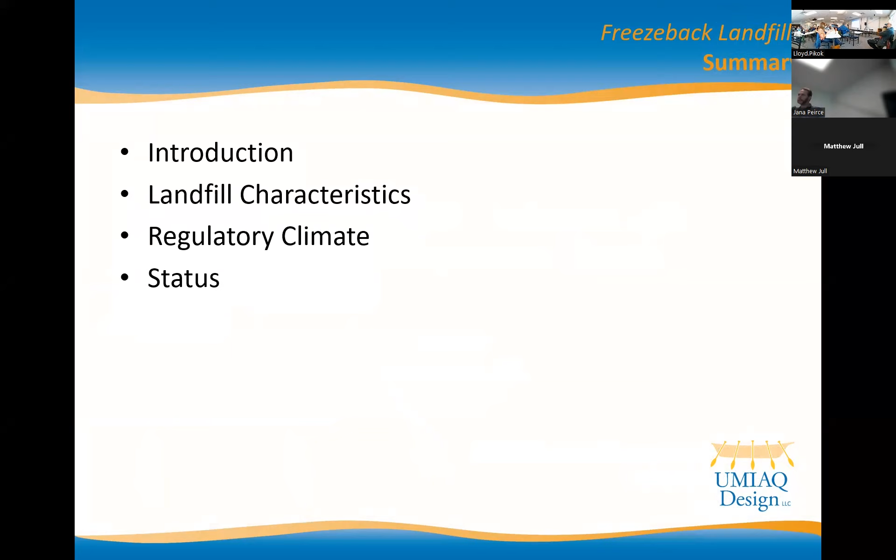This is really just going to be a recap, because we haven't really talked about landfills in this group to my knowledge. It's been kind of an out-of-sight, out-of-mind topic—it's outside of town, and generally people just assume they work. So we'll go over the basics of a landfill, more particulars on what freezeback landfills are, the regulators, current perspective on them, and where that leaves freezeback landfills.

We already did this.

One other thing is that I've spent a lot of time up here doing water and sewer work. I've spent three winters in Point Lay with the group here, as well as three winters in Wainwright, so I've seen a lot of the conditions there change over time—a lot less time than Bill or some of the others, but it's changed dramatically even in my time.

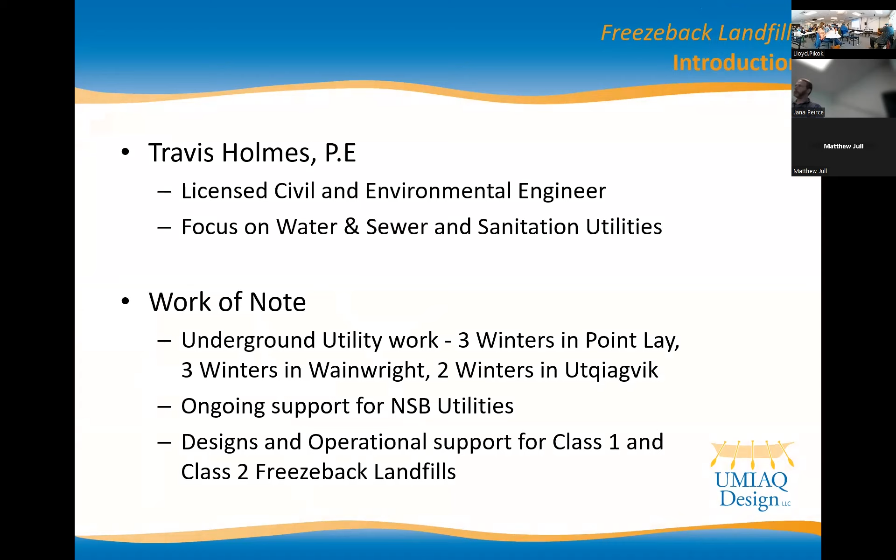Landfills are basically an engineered structure that's regulated by EPA, and in this case ADEC. There are federal CFRs that govern them. The whole goal is to provide environmental protections for solid waste disposal. We need to have that solid waste disposed of terminally—we can't have it leave the site, and we can't allow contamination to a groundwater source, surface waters, or lands. So there are containment structures built in that we'll cover here in a minute.

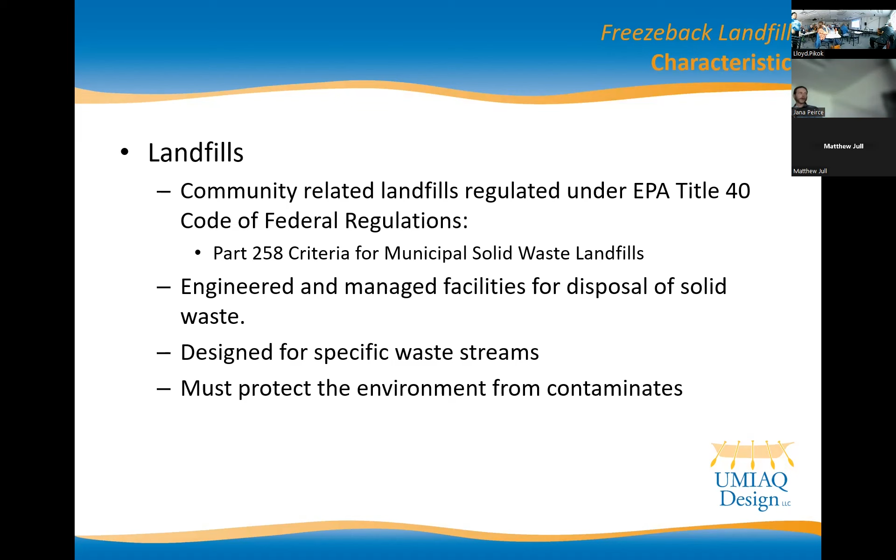I'm not going to be quite as dynamic with this one. If you have questions, go ahead and flag me on the way, and that'll help keep this a little more even-keeled. Landfills have different classifications.

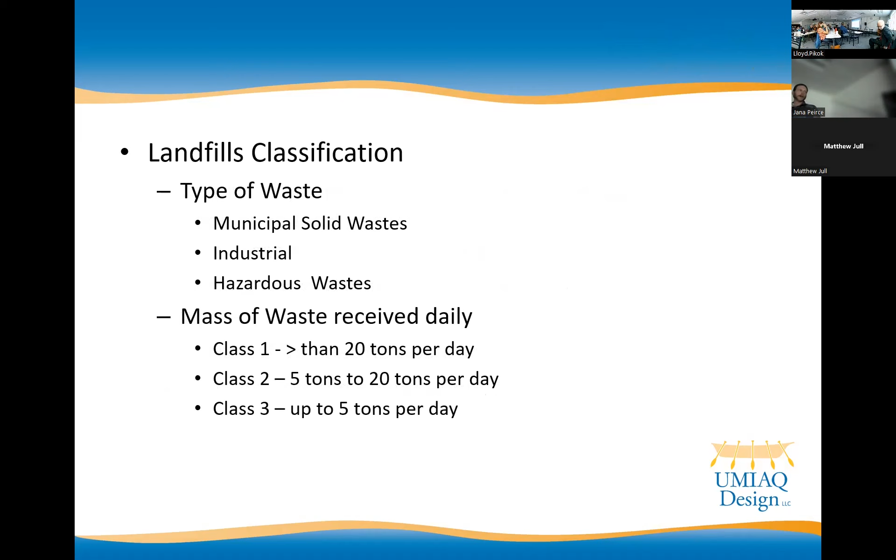Types of waste are a main component. There are some subsets that aren't listed there, and then they're classified by how much waste they receive per day, which affects the regulatory criteria for the landfill, the reporting, and a number of other operational components.

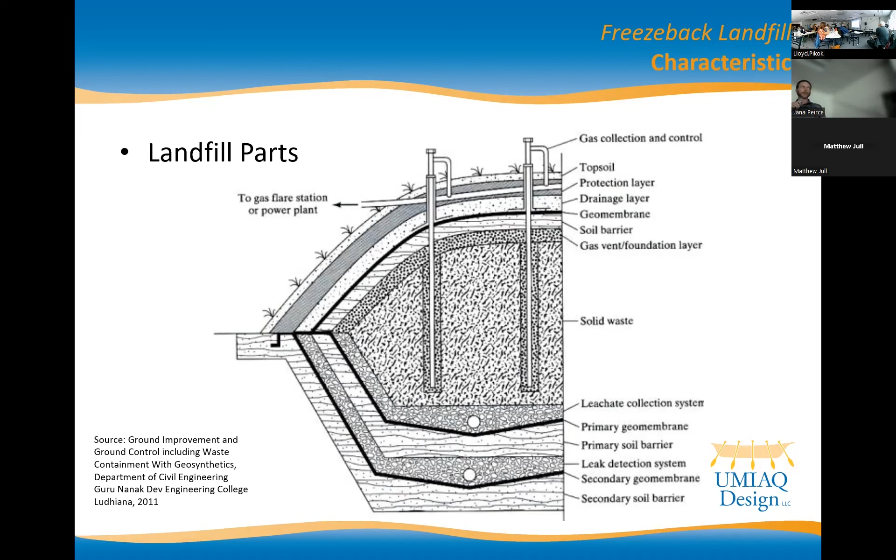So the meat of what we're looking at here today is freezeback landfills. I don't have the history on when this was put into the Alaska regulations—it's not a federally regulated description, but there are certain criteria that trigger it. We have to be on permafrost soils, which the Alaska Administrative Code defines. It has to operate where we don't degrade the permafrost, and we have to ensure that the permafrost remains frozen throughout the open and closed life of the landfill.

Part and parcel with that, though, is as the name implies, we have to be able to freeze our waste. So that's where our challenge is. We'll get into that here in just a moment.

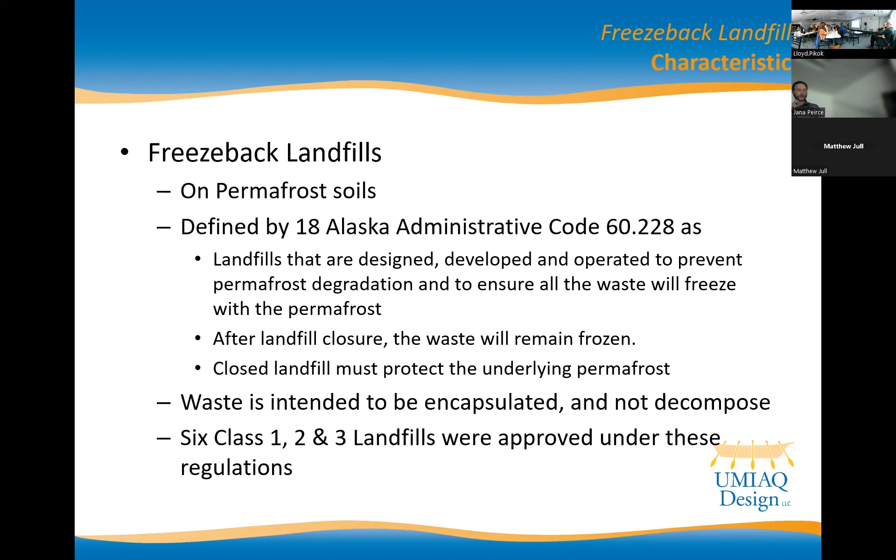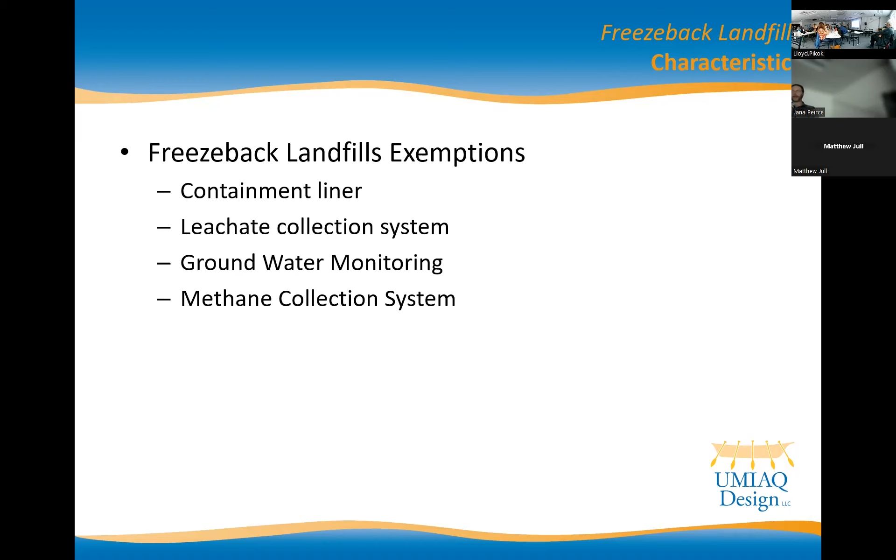Freezeback landfills do offer benefits to the operators, and it winds up being operational and capitally driven components. We don't have to construct containment liners. We don't have to construct leachate collection systems. There's no groundwater monitoring, and there's no methane collection systems because the waste are not decomposing.

A requirement, again, is to keep the permafrost frozen underneath the landfill. So that implies that we either have to have insulated pads or thick gravel pads to do that. We have to provide enough insulation over the permafrost to prevent it from decaying on us. And in order to do so, we have historically used gravel.

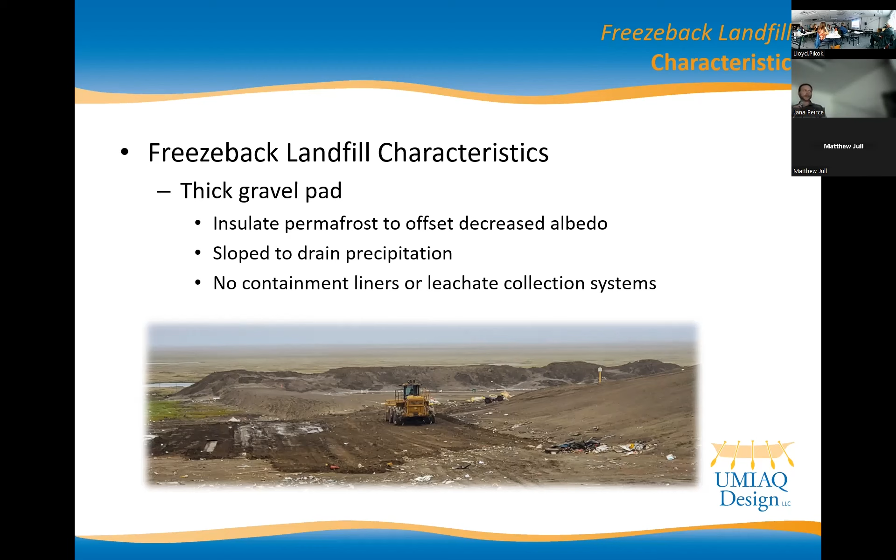That does a few things. A thick enough gravel pad has historically given us enough insulation to protect the permafrost. We slope it so that there's no surface water accumulating in the active cells. And again, we don't have any containment systems or leachate collection.

So the other part of this then is, again, we have to keep the waste permanently frozen. So now we have to have a thick enough gravel cap to do that. Historically, we've just used gravel, no insulation, and that provides the insulation to keep the waste frozen.

Not a problem, because I get these backwards - we increase the albedo of the gravel cap because we generally grow vegetation on top of it. Again, the closed landfill by shop 3, you'll see that we've got quite a bit of vegetation growth on it. So it's not just a brown spot on top of the tundra.

The gravel caps are also designed to shed water so that we can keep moisture out of the waste, avoiding heat transport into the waste mass and causing thawing events. The caps are still low permeability, similar to the other requirements.

One issue though is the soil types that we're using dictate what the cap thickness needs to be. Historically in Barrow here, we use finer grain soils, silty sands for cover, but the new gravel pit is more coarse material. So our cap thicknesses may increase because the thermal resistance is less. And again, freezeback landfills don't need a liner in this case because everything's supposed to remain frozen.

One change for freezeback landfills, though, is a requirement for thermal monitoring. It's something that's been done on slope for years, and it's added to these sites for confirmation that we're keeping the waste frozen. In this case, it's just a typical thermal monitoring well at one of the landfills, and a normal trumpet curve that we'd see for annual temperature swings at a monitoring well on a landfill. Those are 5-foot grids.

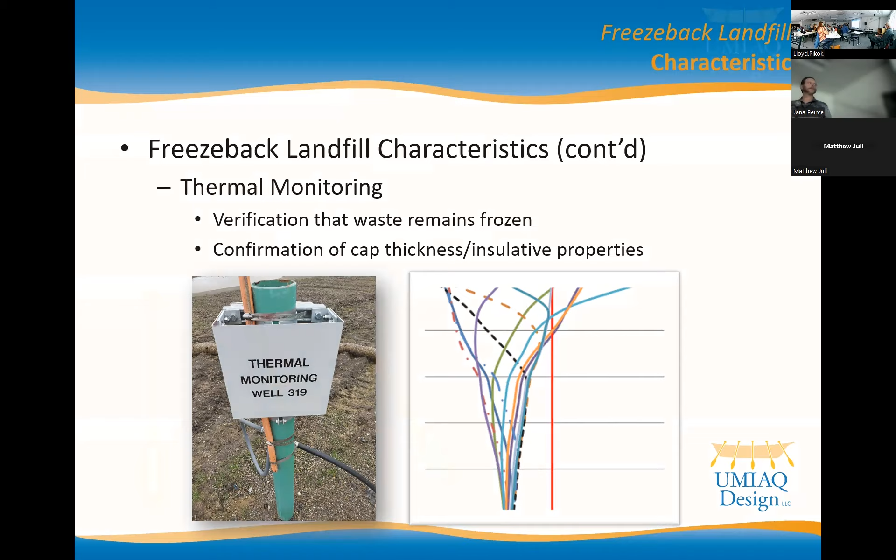So the freezeback landfills require similar planning efforts in order to develop the landfill. You've got to define a service area for a solid waste management plan, identify the waste streams and the characteristics that are going to be disposed of at the landfill.

We also, as part of that, have to identify a useful life of the landfill and the airspace that's going to be required for the volume that you're going to fill through that life. And then you have to describe how the landfill is going to be closed, how it's going to be used, and how the operators are going to monitor it after it gets closed to make sure there's not going to be any environmental issues.

And then you go into the similar things we've just talked about - design of the landfill proper, pad thicknesses, containment structures, erosion control measures, site-specific hazards, seismic, groundwater, proximity to airports, and then for freezeback landfills, thermal stability. And that's really where we are struggling at this point.

So, past freezeback landfill authorizations—this isn't intended to be a criticism of things done, just status of where things are today.

Modeling was done, but it wasn't scrutinized very heavily. There were no requirements by regulators for specific models other than just to say yes, it's going to stay frozen for the period presented. There were no specific climate models requested, and no periods that model had to represent. I think it created an artificial bubble that these facilities were operating in, which is creating a problem now.

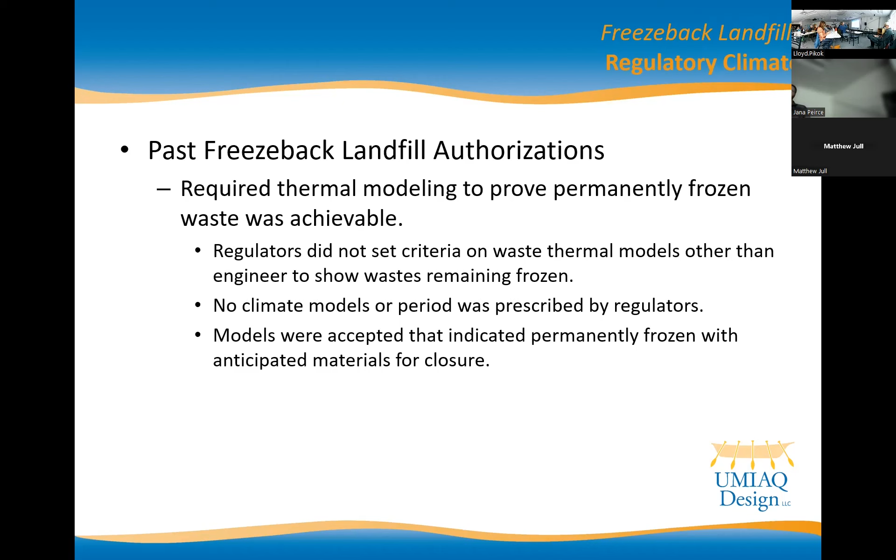Moving forward in time a little bit, in 2017 DEC had announced by public notice that they're no longer going to allow freezeback landfills. That public notice was rescinded for a couple of reasons we won't get into, but that didn't stop their intent. They've raised the bar for any new landfills or expansions of landfills that were freezebacks or intended to be freezebacks.

And that has created a challenge because that bar is super high. They're still not describing any requirements for thermal modeling or horizons other than 'permanently frozen.' They're not saying use an 8-degree increase—they're just saying you have to tell us what it's going to be forever. That really creates a problem because we have low confidence in 20-year forecasts, let alone 50 or more.

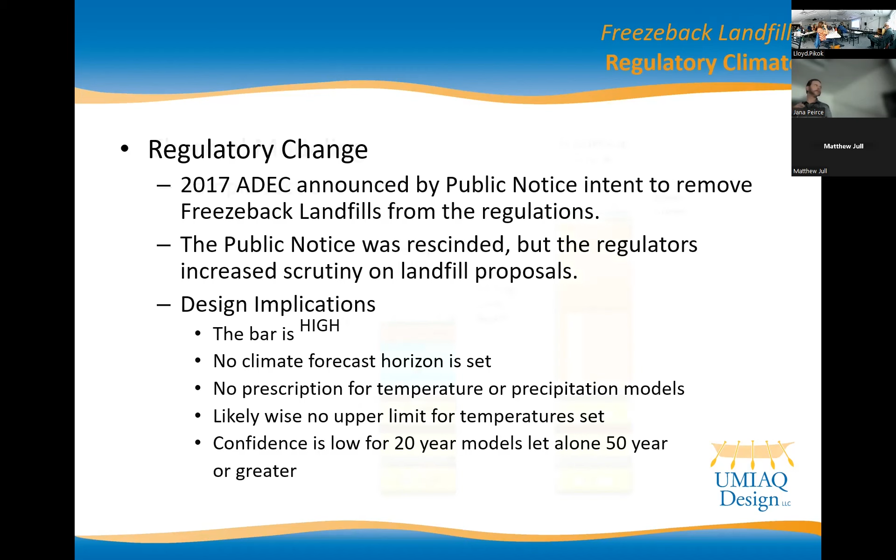So we've gone through some extensive efforts on landfills for thermal modeling. These are snippets from one that we had a firm here in state do for us, and we've gone through a lot of different iterations.

We've gone through different material classes, as you might be able to read—maybe not. The one on the left is sandy silt and silt, the one on the right is sandy gravel. These are equivalents to give you a visual idea of thermal resistance requirements to keep something frozen today.

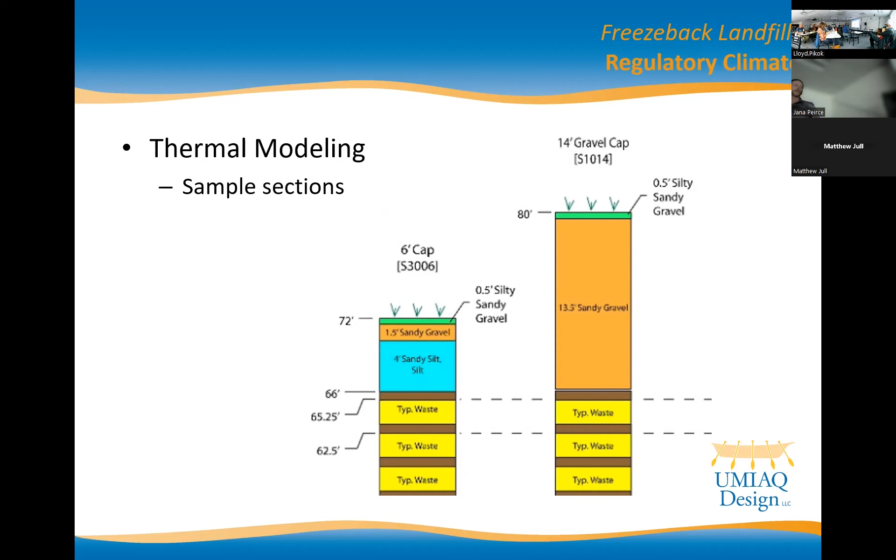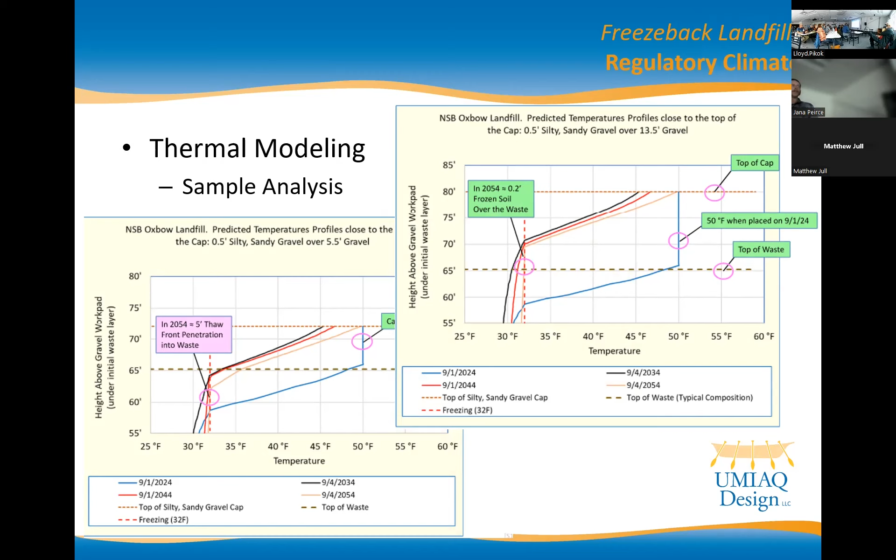This is thermal modeling similar for those two scenarios. We've got a closed scenario—waste day zero when the landfill's closed—and then once we get our cap on it, what those freezing conditions look like for the warmest scenario.

So status: basically freezeback landfills are rated just by an economic consideration. For new constructions of landfills, requirements for closure are going to be closer to 15 feet. Currently we're about 6 feet, so it's a significant cost increase just for closure. I mean, we could get them permitted now, but we're passing the buck down the road, and that requirement's only going to increase in the future.

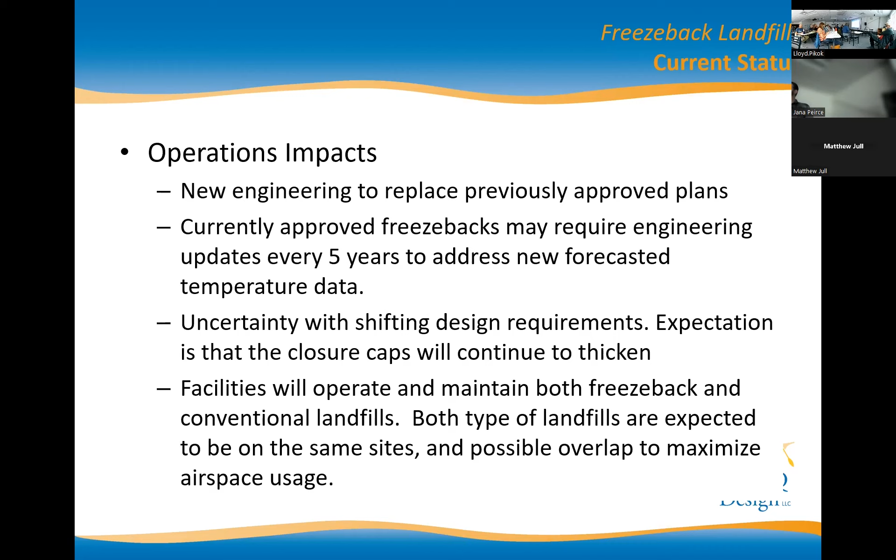It creates new issues for operators because these facilities are now going to have to go conventional. We have to do liners—clay liner with geosynthetics, twice—leachate collection systems, which we have no terminal location for disposal. And we have a lot of fact-finding to do in order to make these successful.

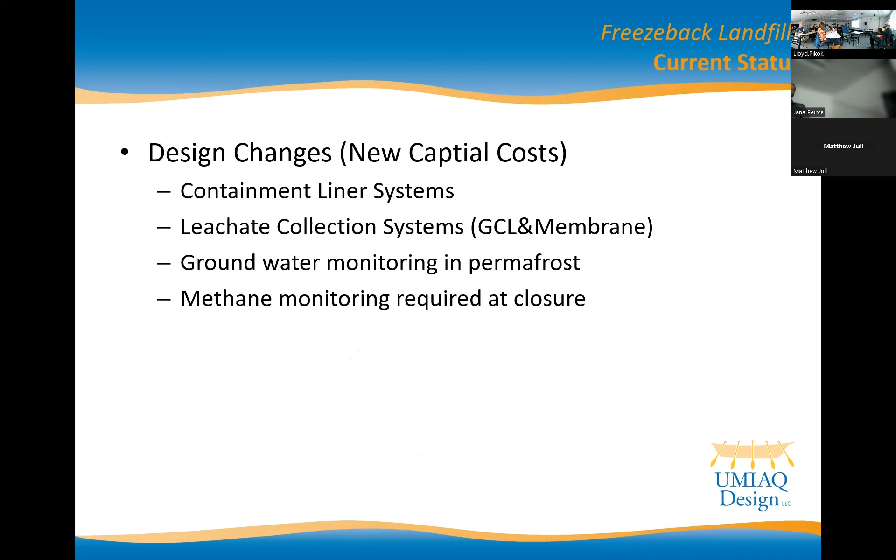We're also going to be doing groundwater monitoring in permafrost—so as valuable as that is—and more methane monitoring now too.

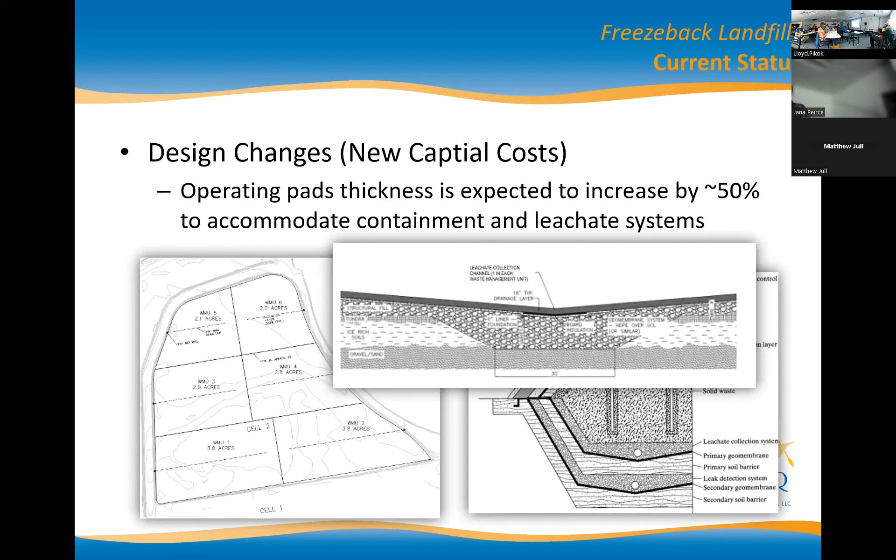Just a couple of graphics, and I know I'm out of time now, but the other challenge is it creates a thicker pad. What I'm seeing is, to get all these structures in the pad for collection systems and monitoring, our pad thicknesses are going up 50%. So we're even adding raw material before we talk containment liner structures and everything else, just to get a landfill built.

And that all factors into issues for operators for training and maintaining new systems.

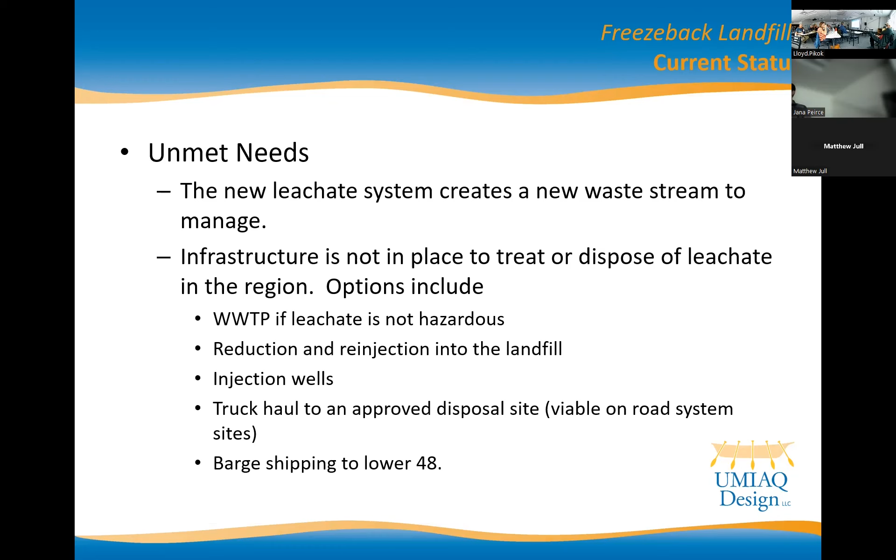Just a quick summary of options for leachate disposal: wastewater plants can manage it if it's not hazardous, we could do reduction and reinjection into landfills, injection wells, or hauling off to outside sites. And again, it's going to increase landfill operating costs, and that's going to factor into waste disposal rates.